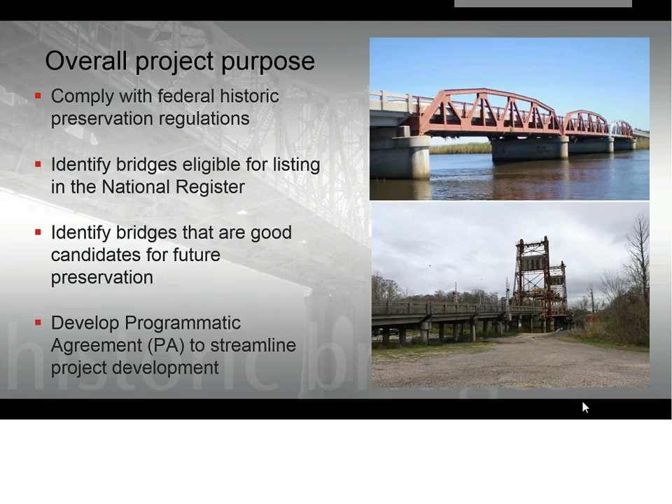All right, one behind on these slides. Next I will recap really briefly the steps in the project that have taken us to where we are today. The project has been going on for 2 years, as I mentioned, and there are 5 key steps. Now we're at the last step, which is identifying bridges with preservation potential.

Throughout this process, we've conducted public involvement and consultation with agencies, owners, and interested parties. The presentation and the consultation meeting being held following the presentation are part of this public involvement and consultation step.

The first 4 steps in the process led to the outcome that we have presented here, which is the identification of historic bridges. We analyzed the state's entire pre-1971 bridge population of more than 4,500 bridges. The reason for the pre-1971 is that there's a 50-year general requirement for historic bridges. That's a minimum criteria, but there is also a desire to have a planning window because projects take a while to develop, and the state doesn't want to do an effort like this more than every 10 years.

So that is the reason for the cushion there. Starting with that population, we surveyed bridges in the field. We conducted research and collected data on bridges that had potential significance based on the National Register of Historic Places criteria. Then applying the criteria and placing bridges within the historic context of Louisiana's transportation and bridge engineering history, a total of 150 bridges were determined eligible for the National Register, representing 3% of the total population. The remaining 4,400 plus bridges were determined not eligible, and we have the agency concurrence on that, and now have that definitive list.

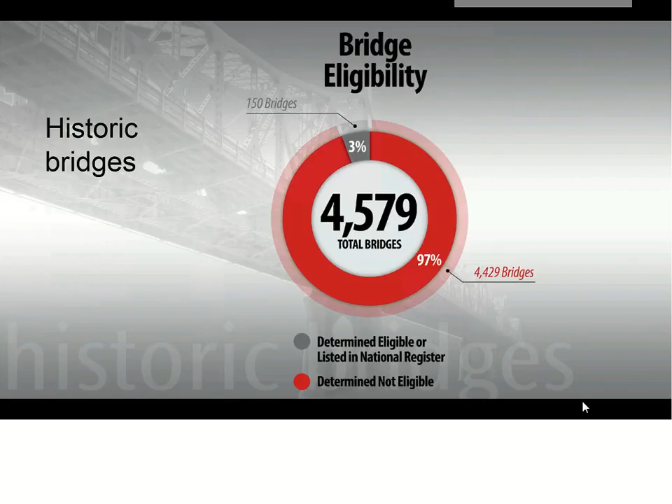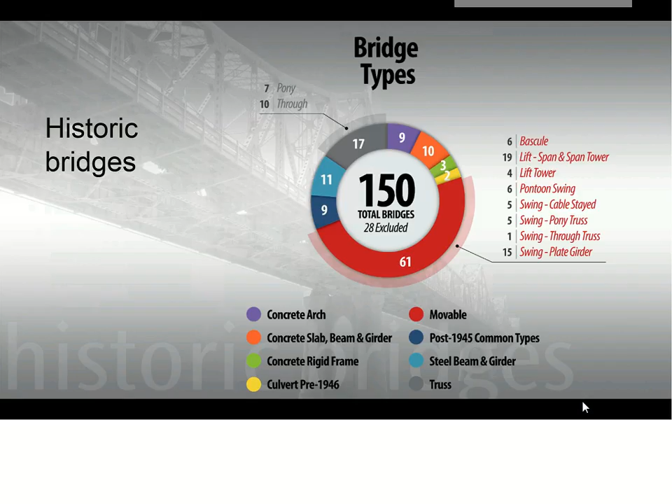So with the population of historic bridges set, we moved to the major step of the project that involved developing and applying criteria to establish which bridges are most suitable for preservation. This step was developed in consultation with our Historic Bridge Committee that I mentioned earlier.

We'll share examples of bridges in each category, explain the reasoning for the placement in the different categories, and provide more information as to how these bridges will be treated in the future based on the categorization.

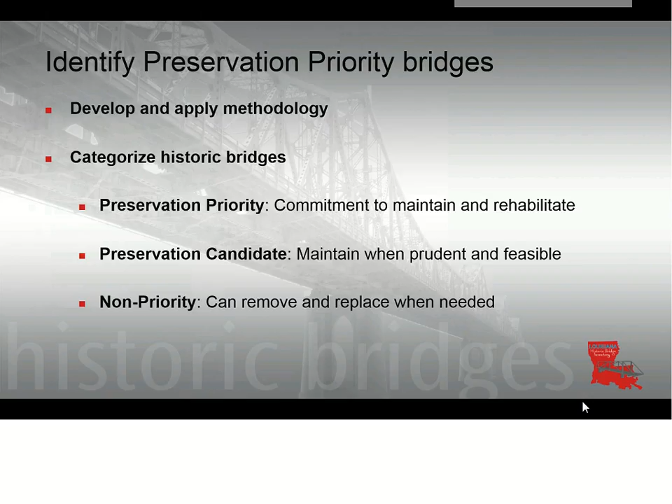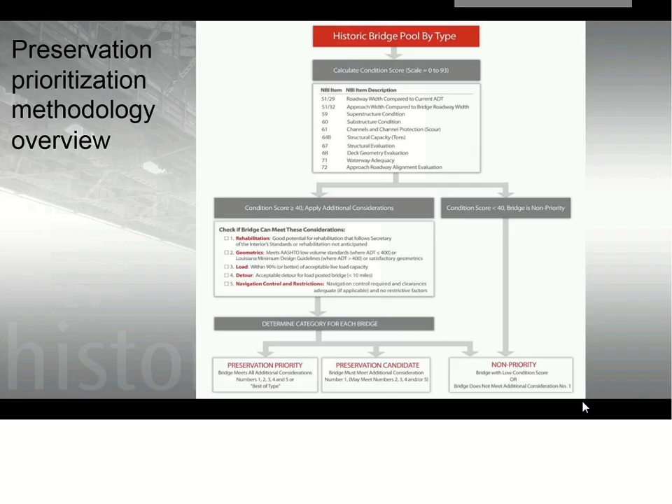So within the pool of bridges in a particular type, our next step is to calculate a bridge's condition score. This slide shows the factors that go into this calculation, which allow us to isolate factors that indicate whether a bridge's preservation is prudent and feasible.

Bridges within the pool by type are sorted by the score, and a high score indicates high preservation potential, and a low score indicates low preservation potential. This range for scores is 0 to 93, with 93 being the highest score possible.

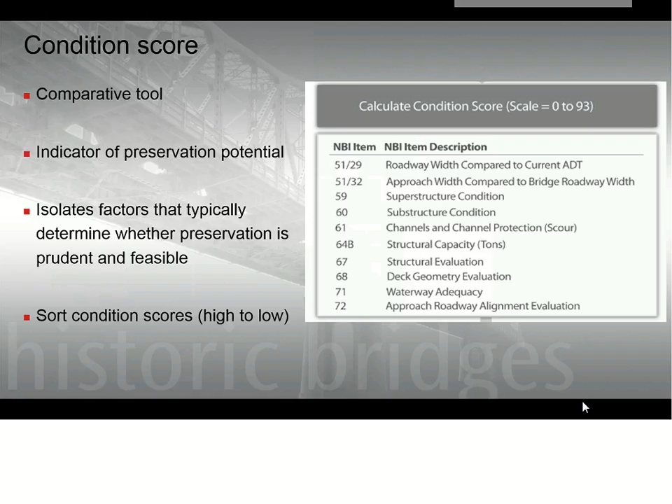Next, we look at the additional considerations for bridges that have a condition score that's greater than or equal to 40. So 40 is the threshold that we use there. Bridges that score below 40 are found to have significant deficiencies that make preservation difficult and imprudent. We'll explain each of the 5 considerations in the next series of slides.

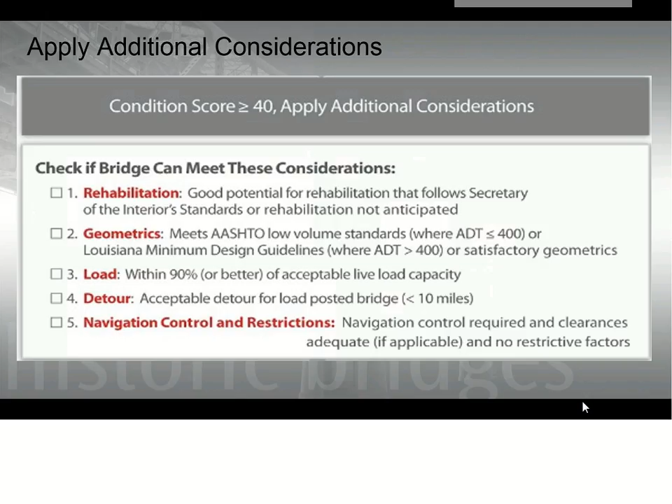First consideration is rehabilitation. This consideration is met in one of two ways. Either the bridge currently doesn't have rehabilitation needs, so the current condition is good, or the bridge has rehabilitation needs that can be met to allow the bridge to remain in vehicular use.

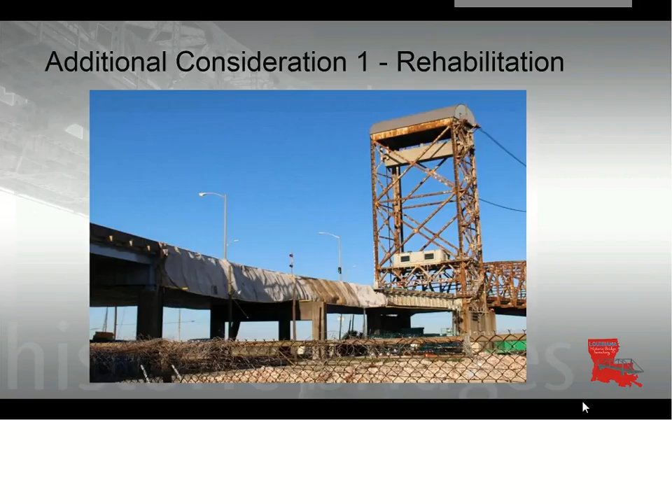If deficiencies can reasonably be addressed by a rehabilitation effort that adheres to the Secretary of the Interior standards for rehabilitation, then it meets this consideration.

The Secretary of the Interior standards are a National Park Service document that's been in use for decades, and it is a guidance for preservation that maintains the historic integrity of a property such as a bridge and allows it to remain eligible for the National Register.

So a bridge may need rehabilitation activities to continue to serve its function, and those can range from addressing corrosion through cleaning and painting of steel components of the bridge to more extensive measures such as addressing structural deficiencies caused by section loss in members or rehabilitating damaged railings. Those are some of the types of rehabilitation activities that were considered.

In this example, the anticipated rehabilitation activity is addressing corrosion issues.

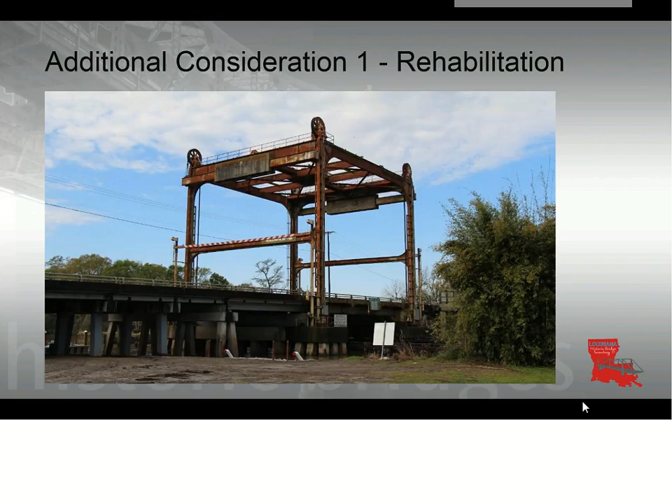So our next consideration is the geometrics. There are different scenarios in which a bridge would meet this consideration, and the consideration measures whether the geometrics on the bridge are adequate.

If a bridge is on a low-volume road, then the low-volume standards, which are a federal standard, are considered, and the bridge is evaluated to see whether it meets that standard. For a bridge that's not on a low-volume road, we referenced the state's minimum design standards and evaluated whether the bridge would meet that. Few historic bridges meet that state minimum standard.

Our next consideration for geometrics was that the engineer evaluated whether the geometrics would be satisfactory for continued use, looking at factors such as the number of lanes on the bridge, the current traffic volume, the width of the bridge compared to its approach width, sight distance, and whether there was any evidence of vehicle damage from the bridge being hit in the past. So those are the geometric factors.

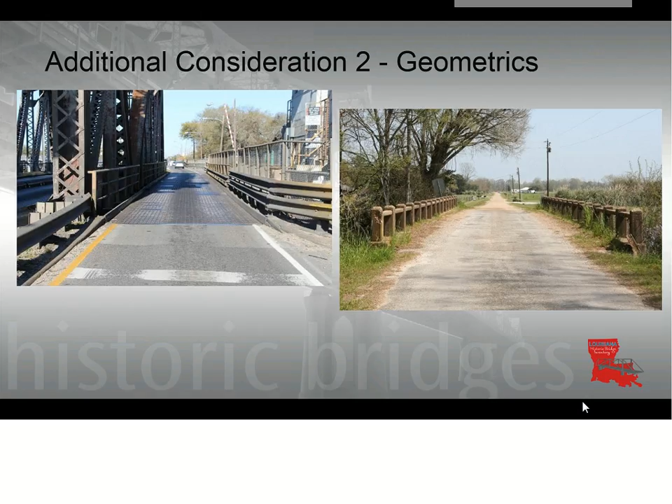Next, we go to the third consideration, which looks at the load capacity of the bridge. Under this consideration, the live load capacity of the bridge is reviewed to determine its adequacy.

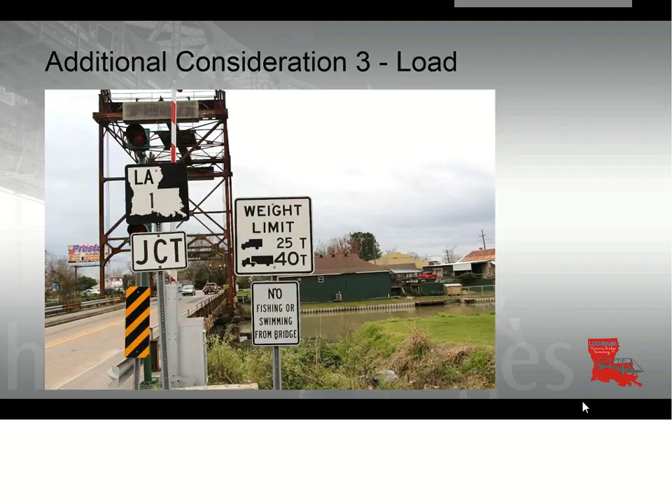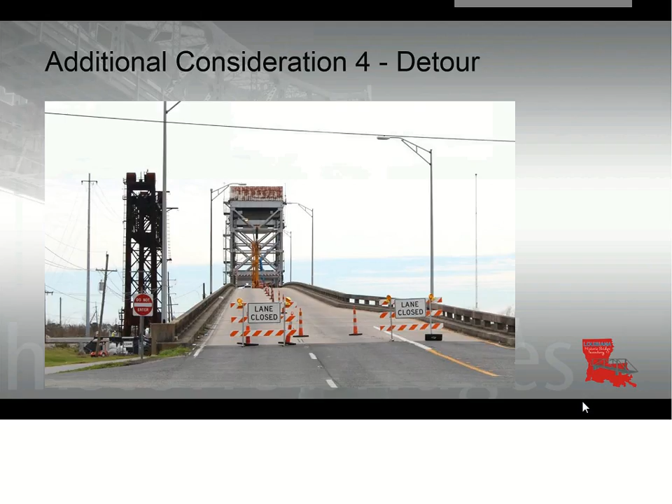Fourth, we have the consideration of detour and bypass length. For this consideration, we look at the load posting of the bridge, if there is a load posting, and consider whether there is an available, acceptable detour route for vehicles that would exceed that posted load. What was considered acceptable was less than a 10-mile detour route.

Our final consideration, consideration 5, looks at navigation control and restrictive factors that can affect a bridge. The navigation controls, navigation protection, and horizontal and vertical navigation clearances for movable bridges, as well as for fixed bridges that span navigable waterways, are evaluated under this consideration.

For movable bridges, if navigation control is required and protection is adequate, and if the required horizontal and vertical clearances are met, the bridge meets this consideration.

Another part of this consideration 5 addresses restrictive factors such as a bridge that is over a railroad crossing. Bridges over active railroads are reviewed to determine if rehabilitation of the bridge would constrain future railroad operations. Here's a bridge over a railroad in Webster Parish.

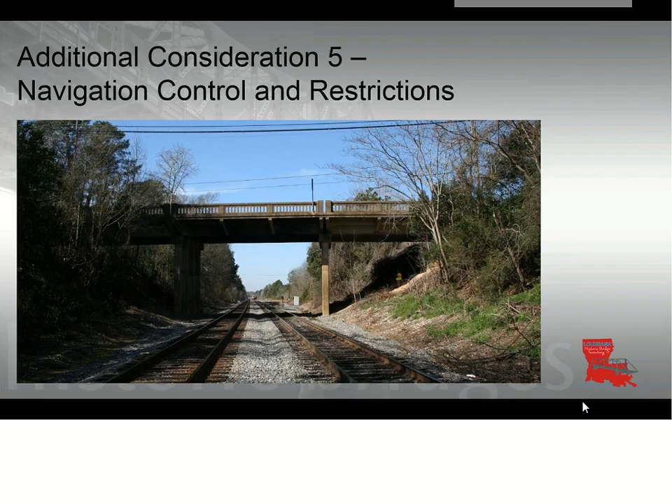The final restrictive factor considered here is a bridge that is part of a spillway. We look at bridges located on spillways whose future preservation potential was limited by the possible need to modify or expand the spillway.

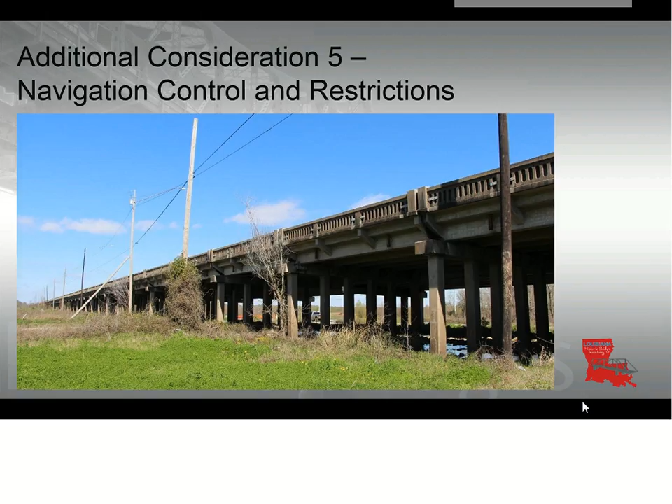But briefly, within these 6 types, no preservation priority bridge was identified in our initial application of the 5 considerations. Therefore, the pool within each type was further evaluated to identify the one bridge that offered the best potential for preservation. Here we gave primary consideration to the live load capacity and whether the bridge is located on a truck route and whether alternate routes were available.

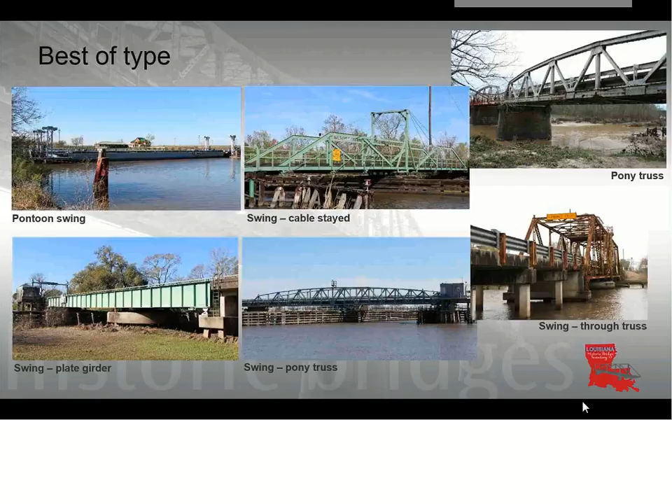Since bridges in this situation will most likely require rehabilitation to remain in service because they do have some deficiencies, the bridge chosen as a preservation priority is the one that best demonstrates that it's both feasible and prudent to preserve.

So applying the methodology for categorizing bridges into the 3 types resulted in the following selections. The methodology was developed and the results were applied with full participation and consensus from the Historic Bridge Committee. You can see the results here.

The preservation priority category has 27% of the bridges. The preservation candidate represents 48% of the historic bridges, and the non-priority is 25% of the historic bridges.

Next, I'm going to turn it over to Christina, who will share examples of bridges within each of the 3 categories.

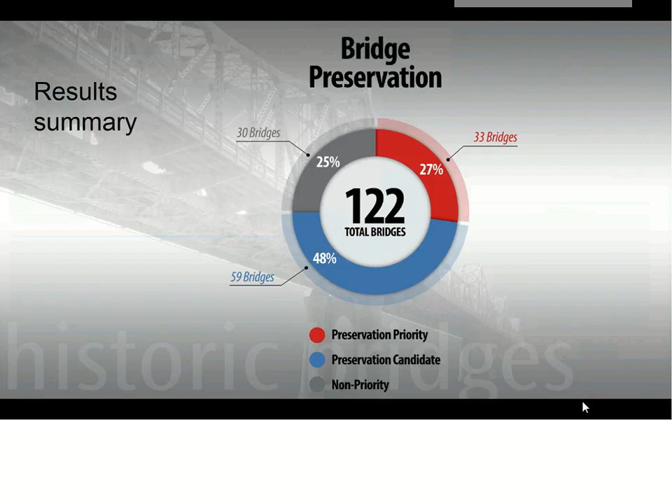Okay, now that Amy's described the methodology, let's look at some examples of bridges within each of the 3 categories. We'll start with preservation priority.

As a refresher, preservation priority bridges are ones that have a condition score greater than 40, that's in the top box there, and the bridge met all of the additional considerations. Also, as Amy described, we had 6 types where we had to select a best of type, and the one selected as best of type in those 6 bridge categories became a preservation priority bridge. So preservation priority bridges have a commitment to maintain them and rehabilitate them when needed. Individual bridge management plans are expected to be prepared that outline short and long-term maintenance and rehabilitation needs and also projected costs.

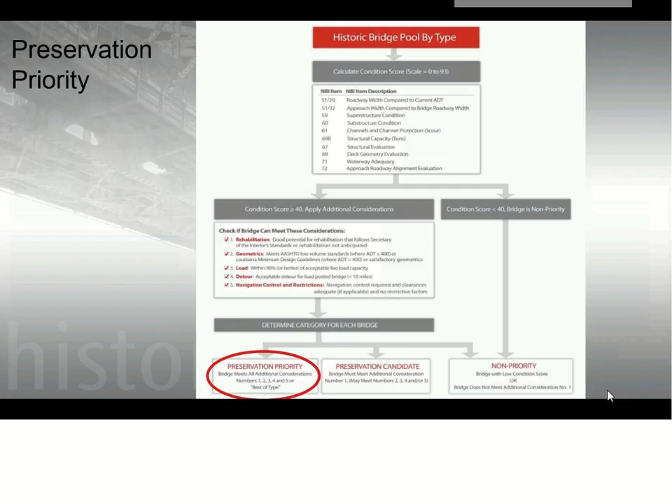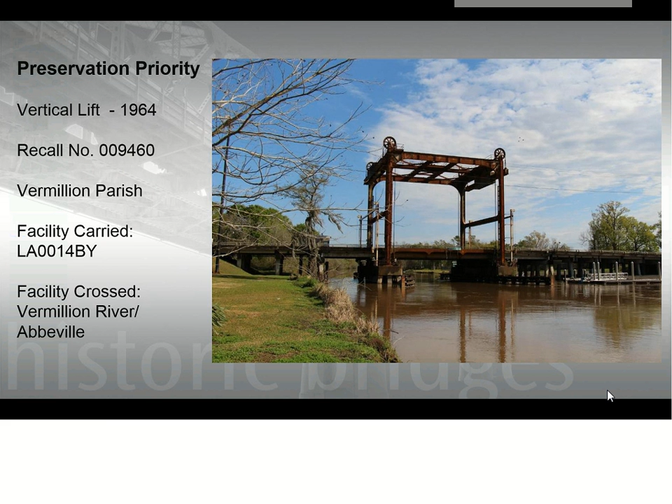Our first example is a vertical lift in Vermilion Parish built in 1964. This bridge has a condition score of 66, well above the threshold of 40. It met all the additional consideration checks. It met check 1: recommended rehabilitation for this bridge is to address corrosion, which can be done according to the Secretary of the Interior standards. It met check 2: it has satisfactory geometrics, the transition between the approach roadway and the bridge does not create a bottleneck, and the bridge carries 4 lanes of traffic, so there's no geometric concerns. It met check 3: there's no load capacity concerns. It's not load posted, so it met check 4. And check 5: it's a movable structure, but navigation control is required and adequate for the structure, and there's no other restrictions. So this bridge, meeting all 5 checks and having a high condition score, is recommended as a preservation priority structure.

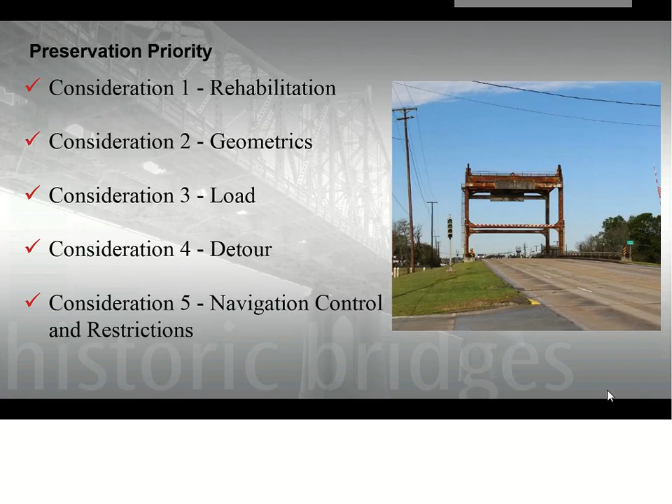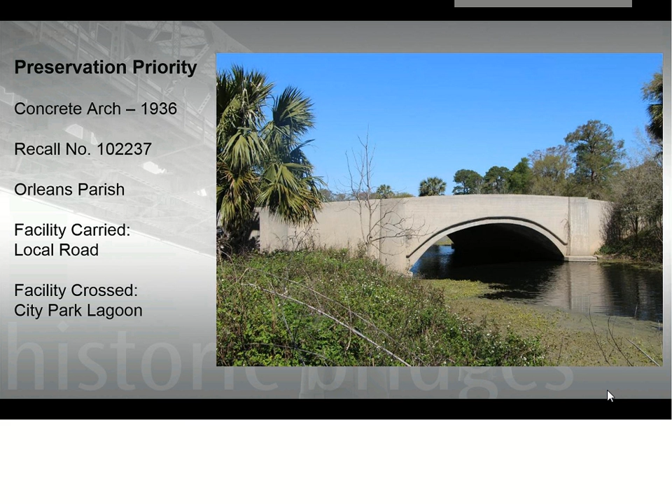Our next preservation priority example is a concrete arch in City Park in New Orleans. This structure has a condition score of 83, and it also met all 5 additional considerations. You can see it's in good shape and good condition, so there's no rehabilitation needed, satisfying check 1. For check 2, the approach roadway width and the bridge width are both 36 feet, so there's no geometric concerns. The bridge has good structural capacity, so it meets check 3. Check 4: it's not load posted, so no need to consider a detour in this case. And for check 5: no navigation controls required as it's located in City Park, and there's no other restrictions. So again, with a high condition score and ability to meet all 5 additional considerations, it's a preservation priority structure.

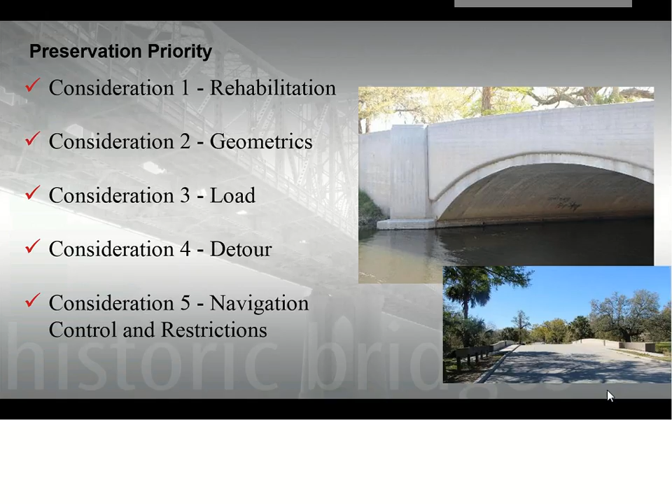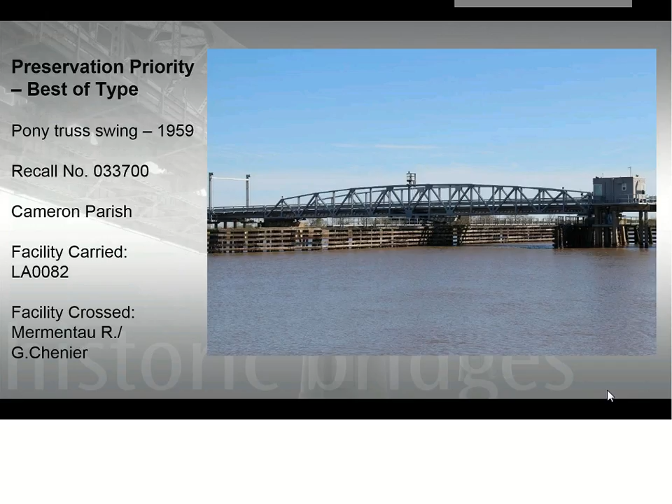Our third preservation priority example is a best of type. It's a pony truss swing bridge built in 1959. There were only 6 historic bridges in this category, and this one was identified as the best candidate within this group for preservation. The structure has a condition score of 47, and it meets 3 additional considerations. It meets check 1: it was recently rehabilitated, including painting that you can see here, and no rehab activities are anticipated in the near future. It meets check 4: load posted, but there's an acceptable detour bypass available. It also meets check 5: as a movable structure, navigation control is required and is adequate for this structure.

However, this bridge doesn't meet check 2 for geometrics. ADT is 1400, so it doesn't meet the low volume standard. The approach roadway width is 33 feet, and the bridge roadway width is 24 feet, which is a constraint. But when comparing this with the other 5 examples in this category, that was found to be acceptable for keeping this one as best of type. In addition, this bridge didn't meet check 3, load capacity, because it was inadequate. So although it doesn't meet 2 of the consideration checks, this bridge was determined to be best of type based on the analysis of other pony truss swing bridges and a cumulative analysis of those structures with their condition scores and additional considerations. This was selected within that group to be the preservation priority example as best of type.

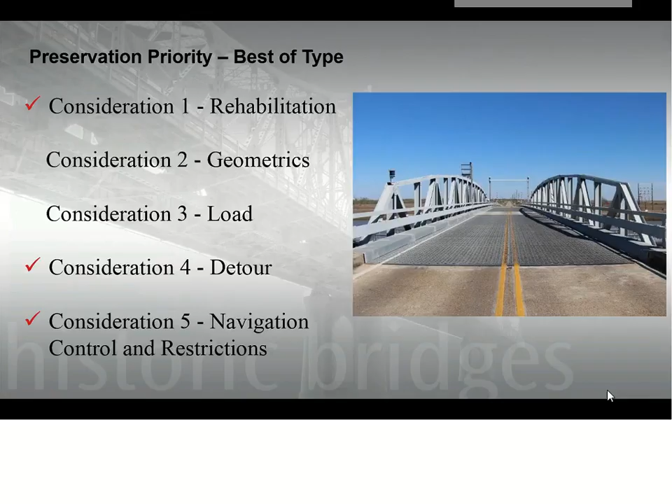Next, we'll look at some preservation candidate examples. A preservation category bridge means the bridge has a condition score greater than or equal to 40, and the bridge must meet additional consideration 1, rehabilitation, meaning it can be rehabilitated in accordance with the Secretary of Interior standards. Historic bridges in this category are designated for maintenance and preservation when prudent and feasible. The programmatic agreement, a culmination of this project, will outline a streamlined method to assess rehabilitation alternatives once a structure is programmed.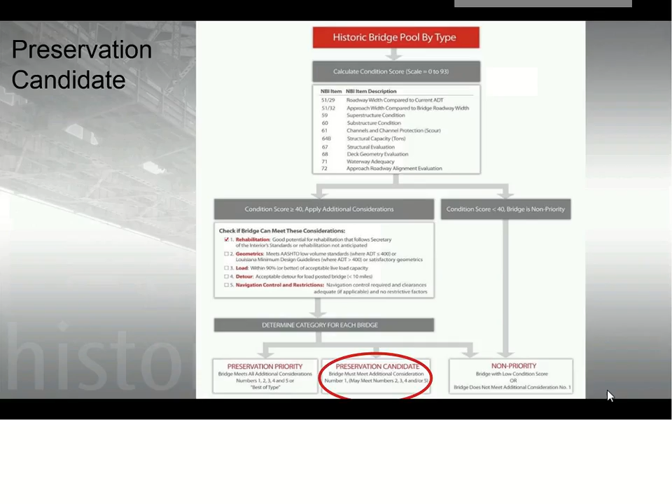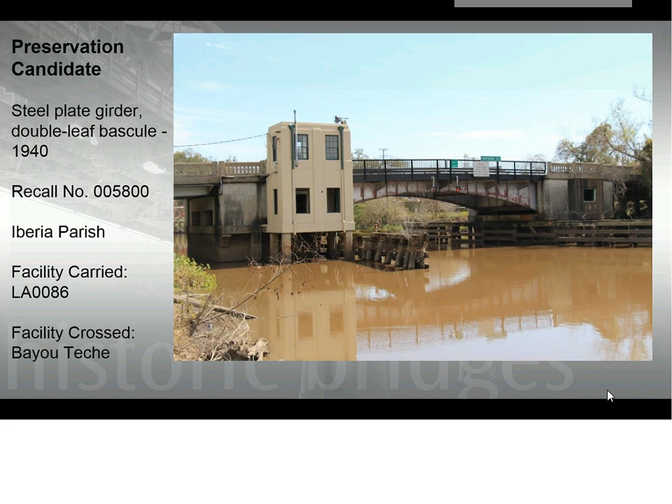Our first preservation candidate example is a steel plate girder double leaf bascule constructed in 1940. This structure has a condition score of 64, above the threshold of 40. It does meet consideration 1 for rehabilitation, and it meets 3 of the other checks, so it's been recommended as a preservation candidate bridge. For check 1, rehabilitation: the structure needs rehabilitation to address corrosion and pier protection, but these can be done in accordance with the Secretary of the Interior standards. Check 2: the approach roadway width and the bridge roadway width are both 30 feet, so it's not a constraint. It meets check 3 because the load capacity is adequate. And the structure meets check 4: the bridge is load posted, but there's a close detour route only 2 miles away. However, this bridge did not meet check 5 due to poor pier protection, but the pier protection could be addressed in a future rehabilitation project. So with a high condition score and the ability to meet check 1 rehabilitation, and also meeting checks 2, 3, and 4, but not meeting check 5, this bridge is a preservation candidate.

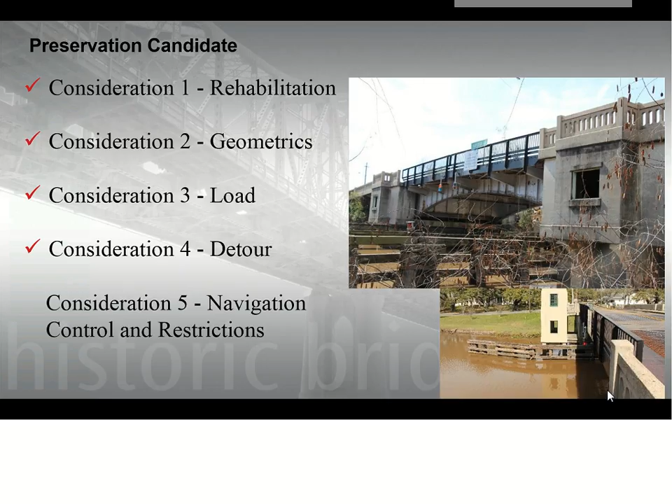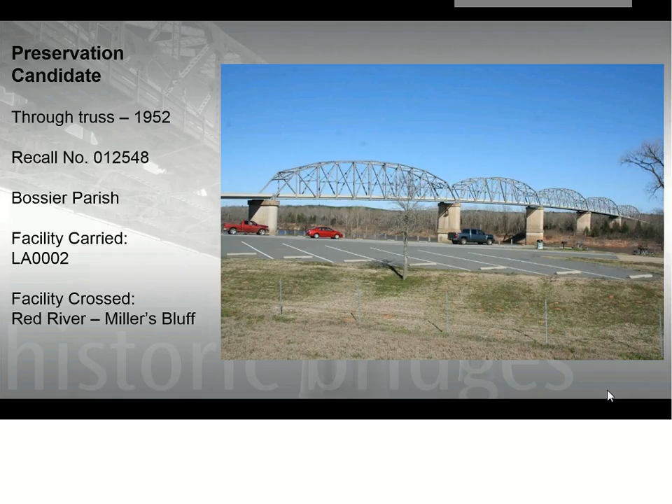The next example of a preservation candidate bridge is this through truss built in 1952. This structure has a condition score of 59. It met consideration 1 and 3 of the other checks, so it's recommended as a candidate.

For check 1, no rehabilitation activities are anticipated. It does not meet check 2, it doesn't have acceptable geometrics. The approach roadway width is 34 feet and the bridge roadway width is 26 feet, which creates a bottleneck.

In addition, there's poor vertical sight distance. The structure meets check 3, there's no load capacity concerns. It meets check 4, it's not load posted. And it meets check 5, no navigation controls required, and there's no other restrictions. So again, the structure is a preservation candidate due to its high condition score and ability to be rehabbed, meeting the Secretary of the Interior standards.

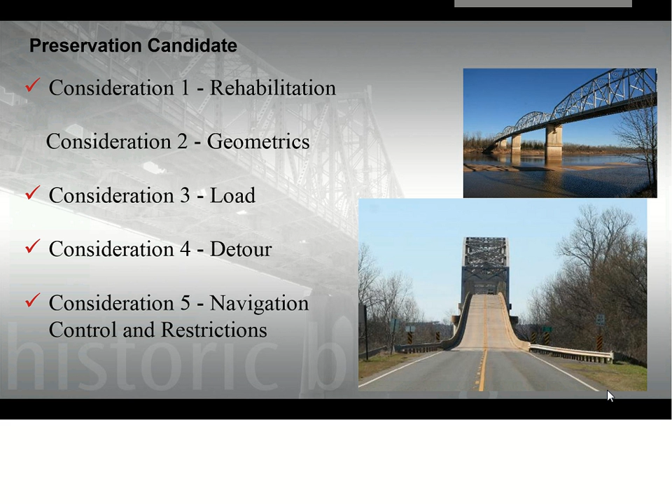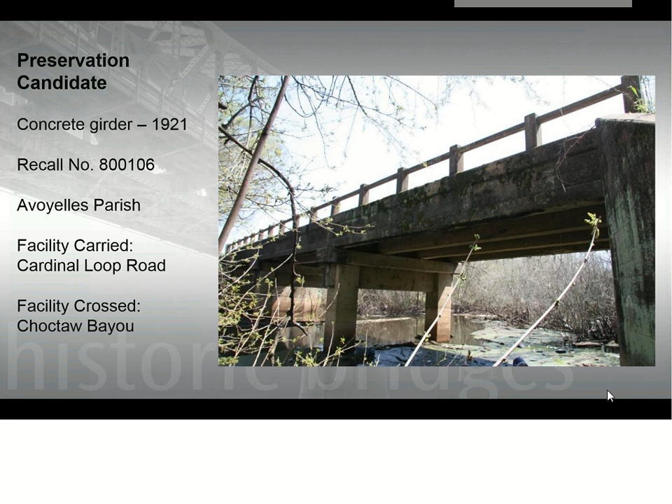Our last preservation candidate bridge is a 1921 concrete girder. This bridge has a condition score of 59. It met consideration 1 and also 3 of the other checks, so it's recommended as a preservation candidate bridge.

For check 1, anticipated rehabilitation activities include addressing structural concerns related to concrete deterioration and load capacity, removal of overburden, which could increase the live load capacity. And these activities are all found to be able to be conducted in accordance with the Secretary of the Interior standards. It meets check 2.

The current ADT is 100, so it meets the low volume standards. It doesn't meet check 3, the load capacity is inadequate. It does meet check 4. The bridge is load posted, but has an acceptable detour bypass that's only 2 miles away.

And also meets check 5, no navigation controls required, and there's no other restrictions. So again, this is a preservation candidate bridge due to its high condition score and ability to meet additional consideration 1.

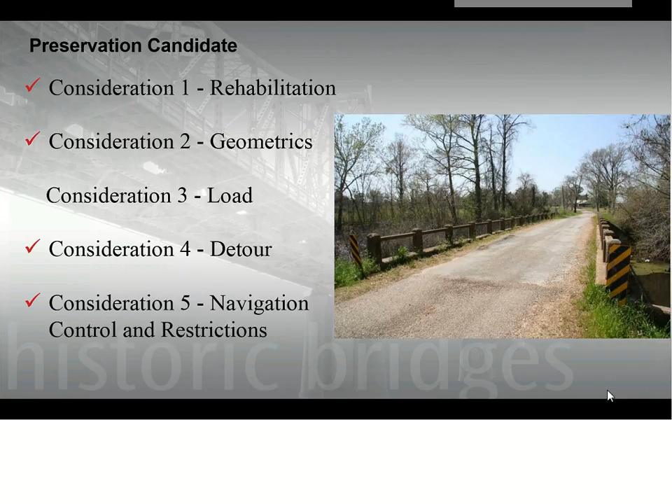Finally, we'll have a few examples I'll show you of bridges placed in the non-priority category. So non-priority bridges are those that have a condition score that's less than 40, or it's a bridge that has a higher condition score, above 40, but it doesn't meet additional consideration 1 for rehabilitation.

These bridges are not ideal candidates for long-term preservation due to their condition and can be removed and replaced when needed. Standard mitigation treatments will be applied, and there will also be global mitigation outlined in the programmatic agreement for these structures.

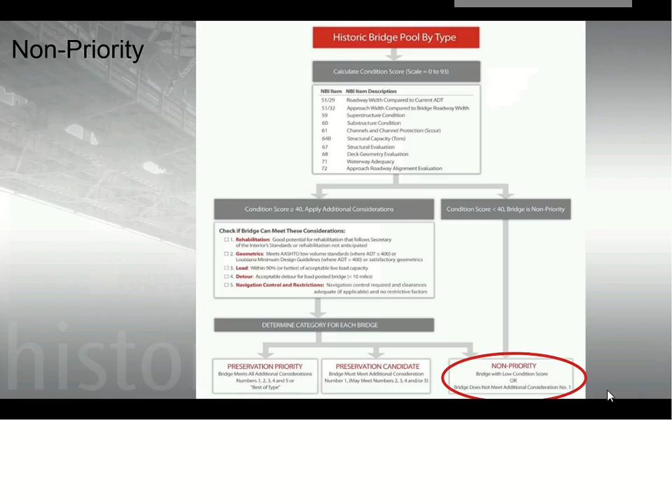So our first non-priority example is a swing plate girder built in 1935. This structure does have a condition score of 49, so it's above the threshold of 40. However, the structure is not able to meet check 1, so it's recommended as non-priority.

It doesn't meet check 1 for rehabilitation because there's cumulative deficiencies on the bridge resulting in needed extensive rehab work that would be difficult to complete in compliance with the Secretary of the Interior standards. In addition to not meeting check 1, the structure doesn't also meet 3 other checks.

Check 2, the geometrics are not satisfactory. The approach roadway width is 36 feet and the bridge roadway width is 24 feet, so we have a constraint there. It doesn't meet check 3, the load capacity is inadequate.

It doesn't meet check 5, navigation control is required, but pier protection is in deteriorated condition, which you can see here. The structure does meet check 4, it's posted, but has an acceptable detour route that's only 1 mile away. So again, this is a non-priority bridge because it cannot be rehabilitated to meet the Secretary of the Interior standards.

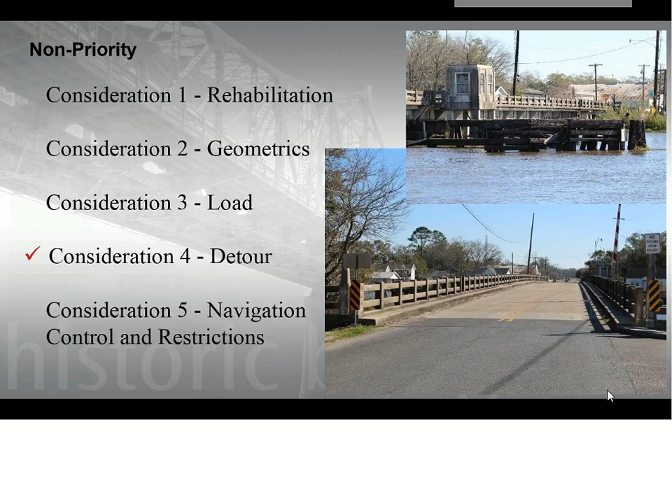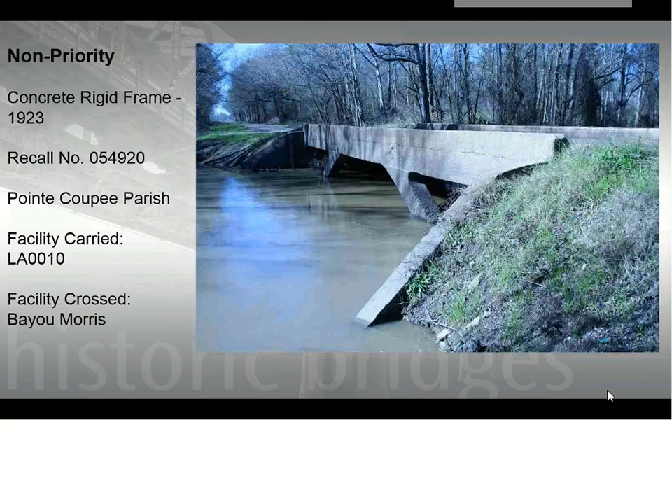Our next non-priority example is a 1923 concrete rigid frame. Like our previous example, this one has a condition score that's above 40. It's just above 40 at 43, but it can't meet check 1, so it's recommended as non-priority.

This bridge would require extensive rehabilitation that would be difficult to complete in accordance with the Secretary of the Interior standards, and those activities would include repairing concrete, addressing debris accumulation. Rehab would also include adding railings and raising the deck surface that's currently subject to significant drainage issues, and you can see some of the water ponding on the deck here.

The structure does meet check 2, it has a low ADT of 250, so it meets the low volume standards. It meets check 3 because the load capacity is adequate. It does meet check 5, no navigation controls required, and there's no other restrictions.

But the structure does not meet check 4. The bridge is load posted, and its detour bypass length would be 27 miles, which is much more than the desired length of 10 miles or less. So although this has an adequate condition score and meets some of the consideration checks, it requires extensive rehabilitation and does not meet check 1, so it's recommended as a non-priority structure.

I don't have any examples to show you here, but I just want to point out that there are other non-priority examples. The majority of them are ones that have a condition score less than 40, and they're recommended non-priority due to their poor condition and difficulty to be able to rehab in accordance with the Secretary's standards.

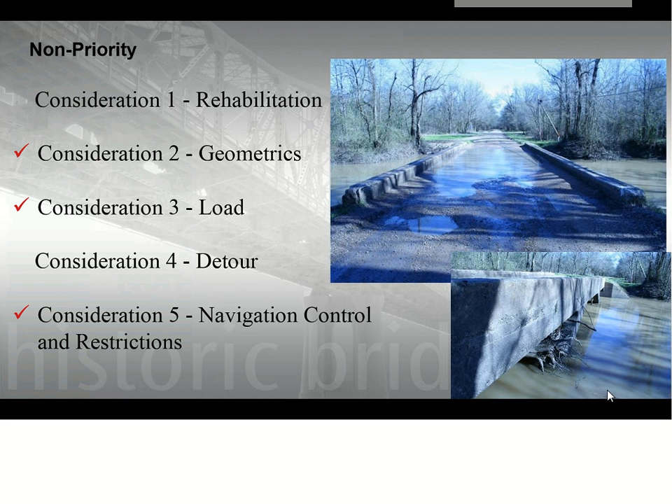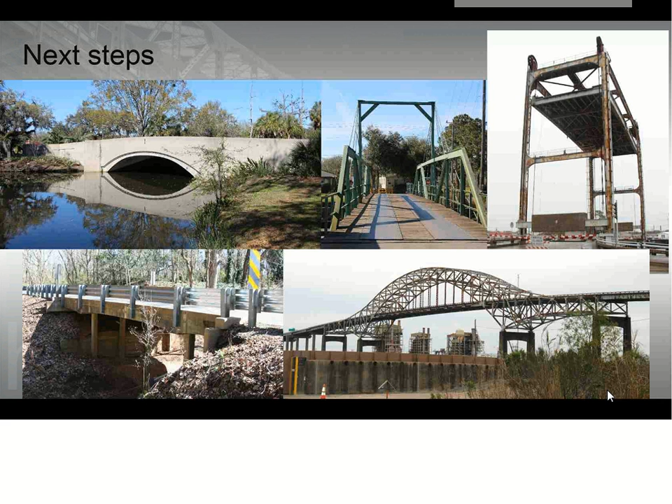Now that we've outlined the methodology to identify the historic bridges most suitable for preservation and seen some examples, I want to quickly talk about the next and final steps for the project: the development of the programmatic agreement and a popular publication on historic bridges.

The development of a programmatic agreement will document and outline treatment procedures for the historic bridges identified through this project. The PA is being developed with the Department of Transportation and Development, Federal Highway Administration, the State Historic Preservation Office, the Advisory Council on Historic Preservation, and other consulting parties.

The streamlining benefits for this project, as outlined in the PA for historic bridges, extend to DOTD and local owners. These benefits include that only 3% of Louisiana's bridges are identified as historic and will require adherence to federal preservation requirements, leaving 97% that can be maintained, repaired, or replaced without adherence to federal preservation requirements specifically related to the bridge itself.

There will be global mitigation outlined in the PA for effects to historic bridges. Bridge owners will have a clear process to follow to complete Section 106 for preservation candidate and non-priority bridges, and preservation priority bridges are identified up front and can be addressed through proactive planning by owners. All of this results in avoidance of delays in project delivery due to Section 106 requirements.

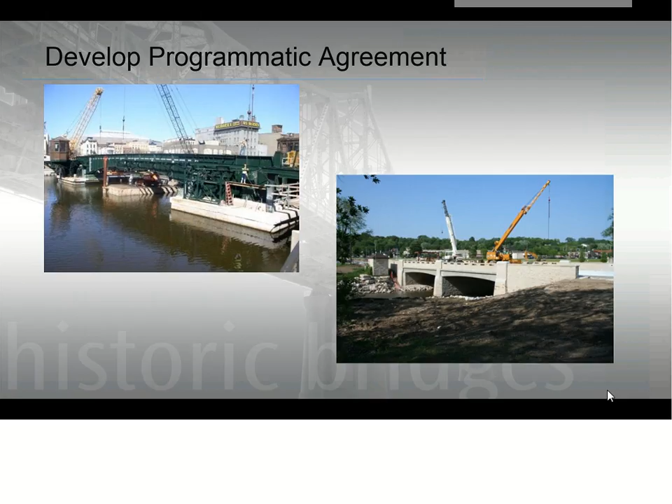The final step of the project will be the development of a popular publication on the state's historic bridges. The publication is one of the global mitigation items mentioned previously to streamline Section 106 projects for historic bridges, and the project will end with completion of the publication and implementation of the PA.

Back one more. I'm going to add the folks that are on the phone, I have to give them the opportunity to ask questions too. All participants are now in interactive talk mode. So we have opened the phone up for anyone who wants to ask a question, and then we'll also invite anyone in the audience to ask a question, which we will repeat so that folks on the phone can hear, unless you want to come up and ask the question. That's also an option. Anyone?